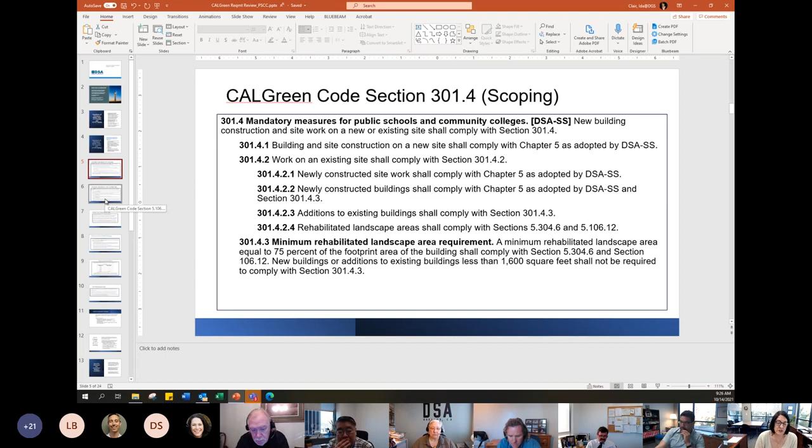Right now, these are not required for a lot of our existing facilities, except for rehabilitated areas for shade trees. But in the future, as we meet our energy efficiency and decarbonization goals, existing facilities may come into the fold. Our shade tree requirements, as an overview, are required in new surface parking areas, new and rehabilitated landscape areas, and new hardscape areas, covering about 20%. Obviously, if you have play fields marked for organized activity, we won't have you put a tree in the middle of a soccer field or basketball court, but near buildings, around the perimeter, there's really an opportunity to cool the site, and that's our goal.

So in our process, if it's not provided at intake, a note will get placed on the drawings indicating that we've seen that, based on your project, this is required and you've missed it. Again, it won't hold up project submission, but prior to back check, please provide this documentation so that we can close out the project.

Electric vehicle charging infrastructure is similar. Right now, infrastructure is only required for new parking areas or additions to parking areas, based on 10% of parking provided. When adding parking spaces, 10% of that total requires infrastructure, meaning raceway and panel capacity. It does not require wiring at this time, but facilitates installation of chargers in the future, either when required or when a school district chooses to install them. Just the infrastructure is required right now; the chargers are not required at this time.

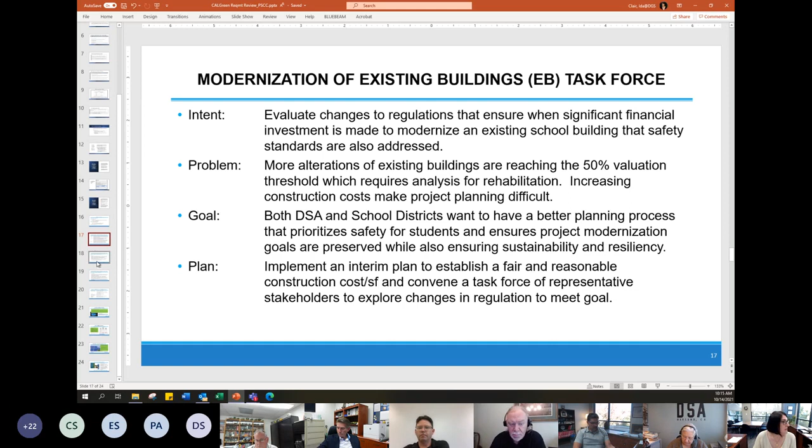So in discussing a little bit about our first plan, the interim plan, I'm going to offer Kurt an opportunity to discuss our process to hire a cost estimating consultant. And this will take us to whenever a regulation may come into effect. The earliest would be August of 2023.

Go ahead, Kurt. Sure, thank you, Ida. Good morning. I'm going to give them a little background because, as Paul Rooney said, we're always trying to help, and sometimes there's an unintended consequence.

And if you didn't know, this past June we reissued IR EB 4 for the rehabilitation required by costs. After that implementation, we heard from a lot of our stakeholders that there was an unintended consequence of that, and so we quickly rescinded it and reissued the previous IR, which stands right now.

And that takes us to where we're at today, trying to look at how we implement a new IR that is responsive to what is going on for the school districts and takes into consideration sufficient advance notice to implement the changes that are required, and the length of time for you to plan a modernization project without impacting your completion. That is our goal.

And so what we have done is put together requests for proposals from outside contractors who are specifically in the cost estimating business. As Ida said, we are not cost estimators.

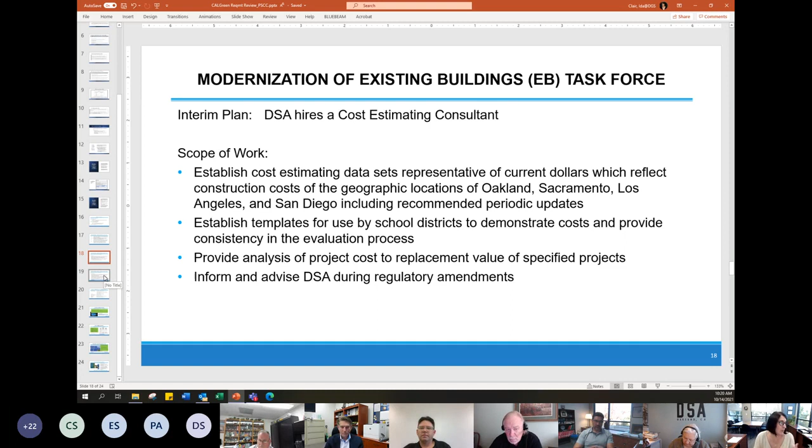We realize that we have consultants now to do our plan review work when we're busy. We're probably of the realization that maybe we need a cost estimating consultant for the ongoing work. Our goal here is to establish an interim cost, but maybe the regulation change will require us to still have that cost value updated periodically. So while we're saying this is an interim plan, it's interim till we figure out what the regulations require. But it may be that moving forward we do need to hire cost estimating to assist DSA. I'm going to present the task force component now, and then we can take questions on all of it so you can get the larger picture.

In the past, we've created task forces in the access team for access development rulemaking that have worked very well, and so we're using that model. What does a task force mean?

When we have a problem that we're presented with - I'll give you an example, electric vehicle charging station accessibility. Federal requirements don't have one. Access team was required to come up with accessibility requirements absent federal standards. So how do we do that? We need to inform ourselves of all the stakeholders and what's needed.

Essentially a task force is a representative group of stakeholders willing to work on a specific problem in detail. We come to the task force - it is selected by DSA from people who have indicated interest. In other words, we don't say, hey, will you join us. We say, are you interested in participating and doing the work? Because it will take work.

From who we garner interest, we will select representative people. Our goal is to have maybe a dozen people that are representative of who are affected by this change, very broad-based, and work with us on the problem.

So this is not necessarily an engagement like the PSCC where you are a conduit for reaching your larger audience. It really is that I have experience with this problem and I can provide a direct response as to your questions. DSA proposes questions to this group really on a fact-finding mission.

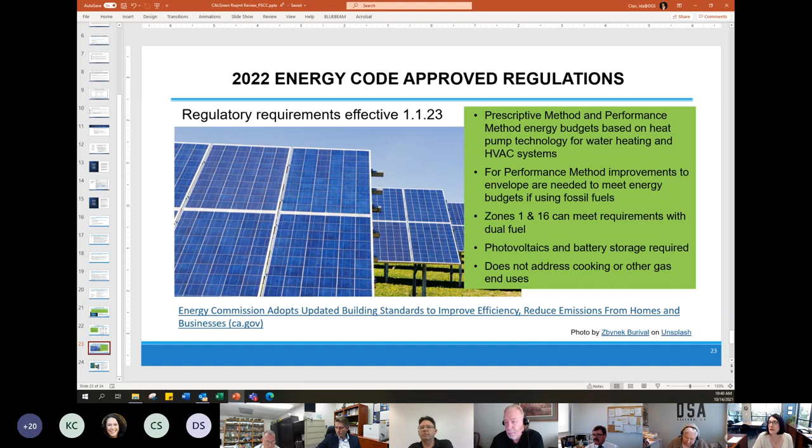I think it's important to understand that the carbon monoxide detection requirements are a model code requirement in the IBC and the IFC, which were adopted by the Office of the State Fire Marshal. So these regulations were not written by DSA or by the State Fire Marshal's Office. The amendments in Section 915 for carbon monoxide pertain to addressing certain statutory requirements, and that will be the italicized language you would see in 915. But again, that has to do with statutory requirements that the State Fire Marshal's Office has to include in this regulation when they adopted it.

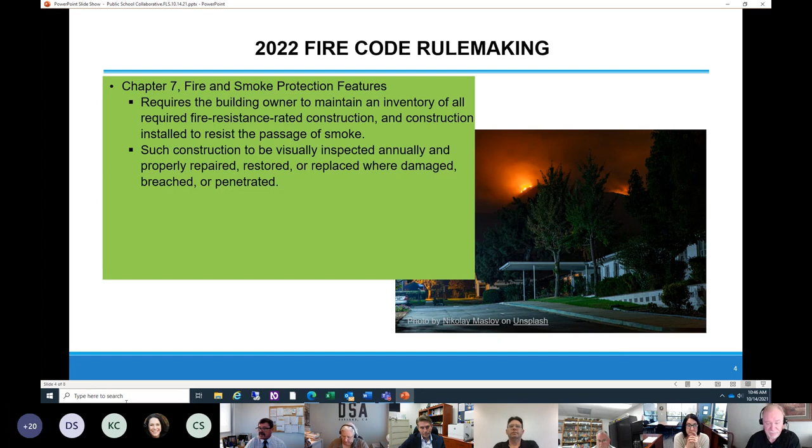Chapter 12 Energy Systems. This is something that is dear to the state's heart, again, in keeping with our net zero policy for schools. A lot of energy systems, battery storage, solar, photovoltaic, things of that nature going in on our campuses.

Some of the previous provisions in Chapter 12 of the Fire Code have been amended. There are requirements therein for emergency and standby power systems, plan information for construction projects, which is certainly going to affect the design community and submitting to DSA on plans for battery storage systems and energy storage systems on the campuses. These are certainly going to affect your photovoltaic battery storage or any other kind of emergency power storage system that is going to be constructed on the campus.

And of course, we're going to have commissioning and decommissioning, and operational and maintenance provisions included there in Chapter 12 of the Fire Code that, again, the facility staff are going to need to be aware of. So at the time of commissioning of DSA projects, you'll be able to get those records and maintain those records for further review or reference should the need arise.

Chapter 49 requirements for the wildland urban interface areas. Construction drawings that we're going to be in Chapter 7A of the Building Code. This is just to let you know that there are also requirements in Chapter 49 of the Fire Code. There's been some changes instituted, obviously in response to California's wildfires. Used to be fire season started in October and went a few months. Now it appears that fire season runs from January 1st to December 31st, and then we start all over again.

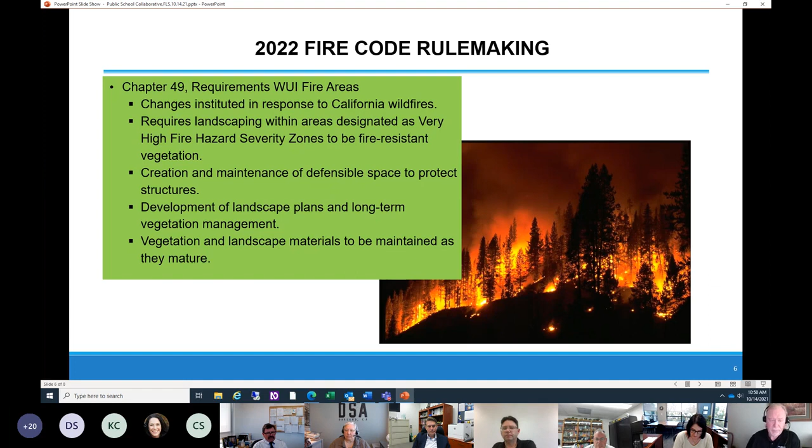Something new that is coming out in response to questions from a couple of landscape architects and some designers pertaining to fire department access and site water supply requirements. The FLS staff is creating a PowerPoint presentation to outline these requirements. Our goal is to ensure consistency and maintenance with the fire code provisions for emergency vehicle access and water supply.

When this is fully developed and ready for use by you all, you'll get an email message through our communication system that will let you know where to access this. The goal is to have this be available through our training area on the website in an on-demand format, so you can reference it at any time. It will be updated as codes update.

The goal here is to give some background into the whats, wherefores, and whys of the fire lanes and fire department water supply that is needed. This will be especially important for modernization and alteration projects and new construction on existing campuses where buildings may be sited such that they impact existing fire lanes, and now those fire lanes have to be modified or extended to the interior of a campus, which in itself can pose a problem. Real early on in the development design phase, we certainly want to address this type of an issue.

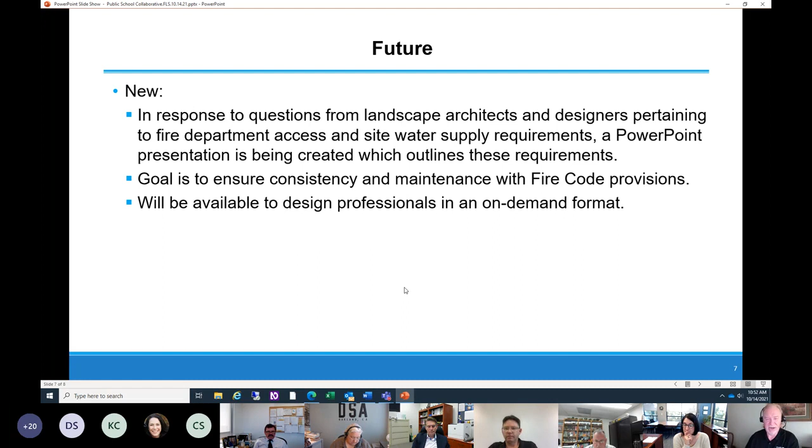I strongly encourage that you utilize the preliminary review appointment process at the regional offices to go over any such issues so you're aware of them ahead of time and they don't blindside you in the design end. And of course, subscribe to our listserv. We want you to get information and be informed about actions that are going on at DSA. Please make sure you have our current access and that you're getting everything you need. And that ends my portion, thank you very much.

Thanks, George. Do you want to take questions on that now at all, or? If there are questions, please. Anyone? Okay, Diane, thank you. Hearing none.

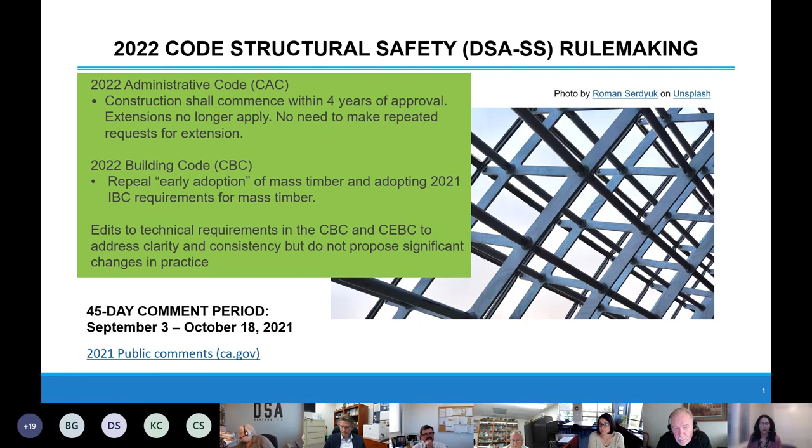As George mentioned for the fire, we're in the same boat for the structural safety package. We are still in our 45-day comment period. It ends on Monday. There's a link here. As mentioned earlier, you'll receive copies of this presentation, but you can go to BSC's website and see the full packages for all the agencies. There's also an electronic submittal for comments, but we're getting close to the end of the comment period.

There's language in the admin code that talks about a fee payment for landscape documentation. We're not currently doing that, so we're getting our regulations to catch up with that current practice.

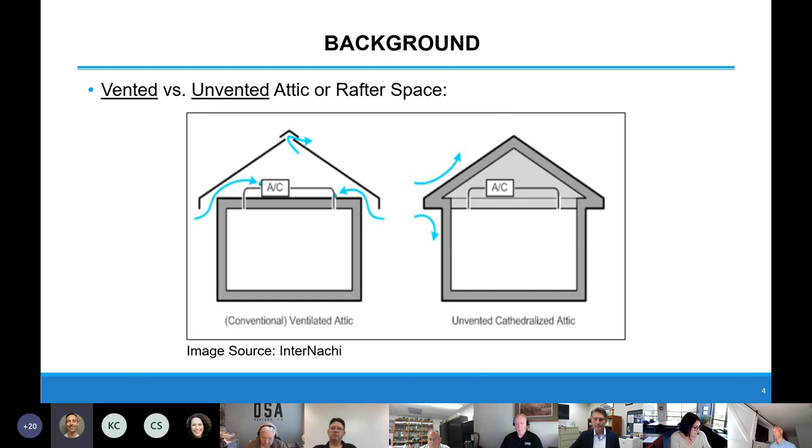Continuing background on enclosed attic spaces: traditionally, attics and rafter spaces have always required ventilation. It's relatively new that criteria were put into place allowing unvented assemblies. The concept was initially introduced in the 2016 California Energy Code, but wasn't made effective for DSA projects until new language was provided in the 2019 CBC, the current code. I've provided an excerpt from the 2016 CBC as well as the 2019 code.

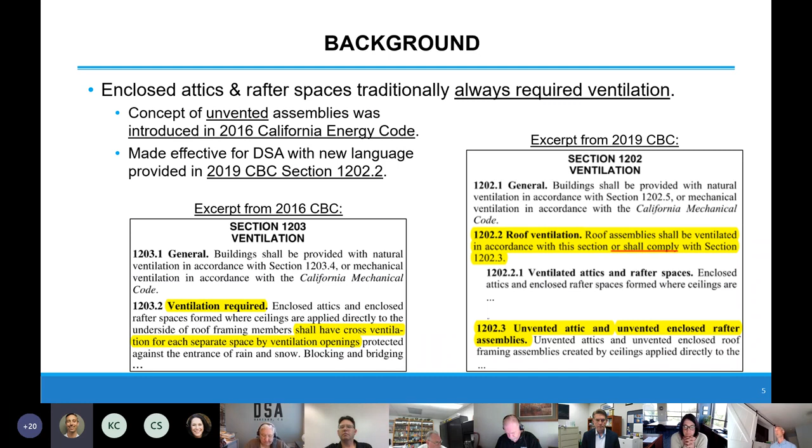On the lower left, you can see that ventilation was required: all projects with attic spaces shall have cross ventilation for each separate space by providing ventilation openings. In the 2019 CBC on the right, a new section 1202.2 was added stating that roof assemblies shall be ventilated in accordance with the prior section, or there's also an option to comply with section 1202.3, which lays out all the requirements for unvented attic and unvented enclosed rafter assemblies. That's just a quick background on when unvented was first allowed on DSA projects.

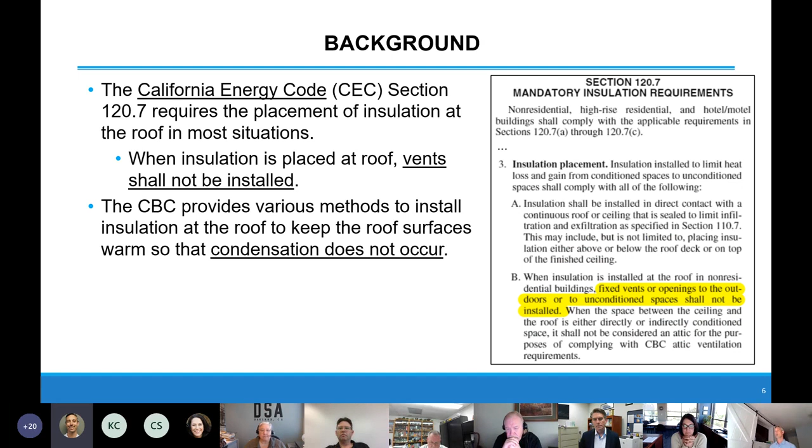California Energy Code also has requirements and provisions that come into play. I've provided an excerpt from section 120.7 on the right. They provide mandatory insulation requirements stating that when insulation is placed at the roof, vents are not allowed to be installed. That poses some problems that need to be worked out - we'll go into that, and we're trying to cover it in the IR as to what you would do when you're not allowed to install vents. The CBC does provide various methods to help with this, to prevent condensation from occurring and avoid material decay.

For the scope of the IR, it's primarily going to be covering two options for roof assembly types. You have the option of doing ventilated, covered in CBC 1202.2, which will address cross ventilation and opening requirements, as well as airspace requirements. We're also going to address fire life safety requirements, actually in chapter 7, but we'll get into that later. Then for unvented, that's going to be in CBC 1202.3, and we'll go over envelope requirements, vapor retarder requirements, airspace requirements, and finally insulation requirements.

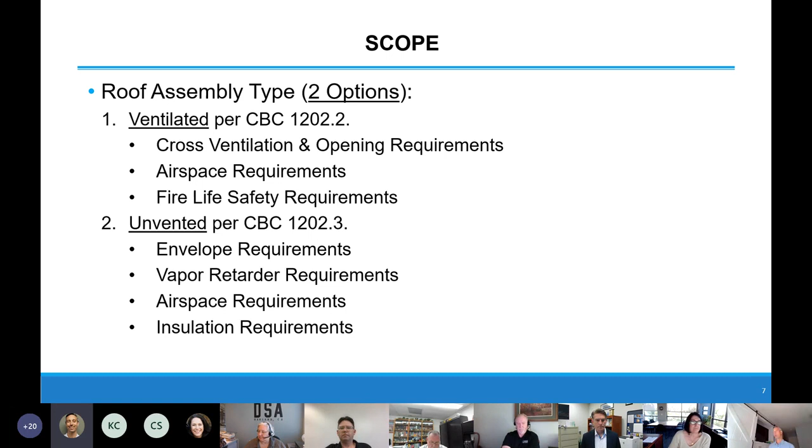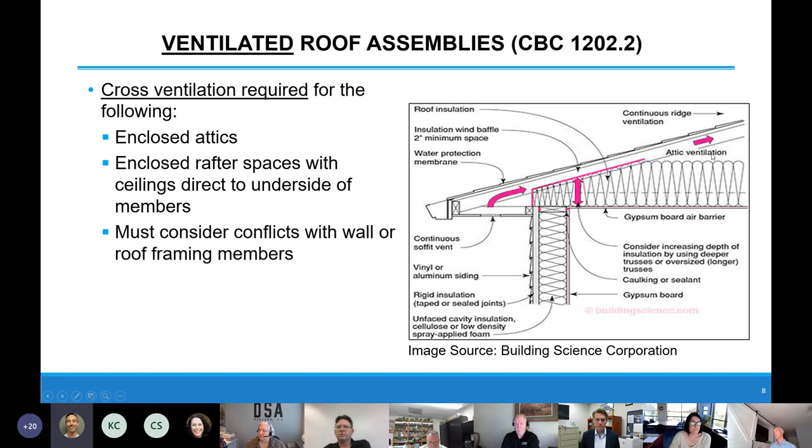A few things that need to be provided: you need a 1-inch minimum airspace between insulation and roof sheathing, and 1/150 net-free cross ventilation area. There are some exceptions that allow that net-free area to be reduced to 1/300 by providing a class 1 or 2 vapor retarder on the warm side of the ceiling. There are also venting area requirements that have to be between 40 and 50% of the area placed in the upper portion of the rafter space. Vent openings also need to be protected against the entrance of rain or snow.

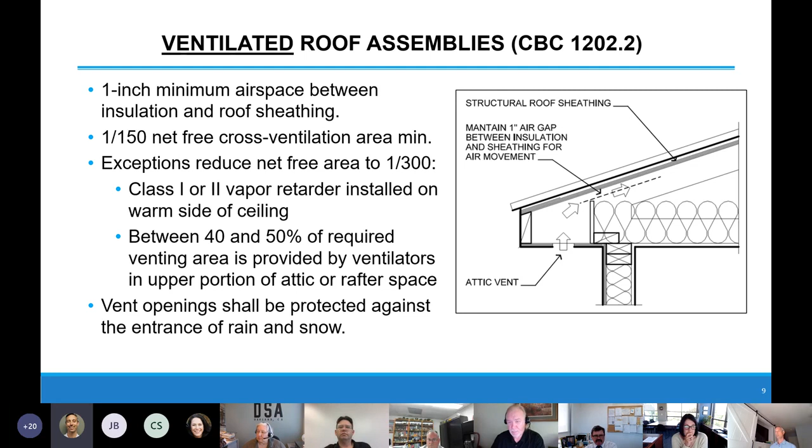As I mentioned before, some fire life safety requirements that we're going to be addressing in this IR: vent screens, when provided, for buildings located within fire hazard severity zones or wildland urban interface fire areas, need to meet the ember and flame intrusion requirements in CBC section 706A. Also, combustion air for fuel burning appliances needs to meet the requirements in the California Mechanical Code, Chapter 7. That also includes carbon monoxide detection, which is in CBC section 915.1.

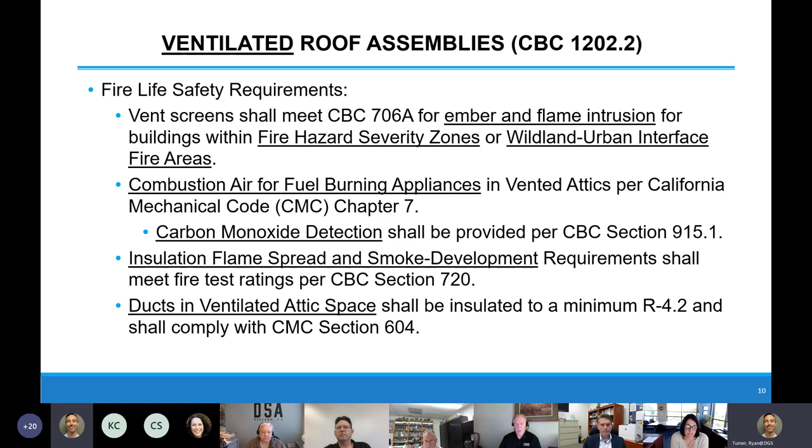Also, insulation, flame spread, and smoke development requirements are going to be addressed in the IR, and those will need to meet the fire test ratings per CBC section 720. Any duct in the ventilated attic space will need to be insulated to a minimum R value of 4.2 and shall comply with the California Mechanical Code section 604.

Okay, so now we'll jump into unvented roof assemblies.

So again, this is addressed in CBC section 1202.3. Any unvented attic and unvented enclosed rafter assembly is permitted, but there are 5 conditions that will have to be met. I'm going to go through these pretty quickly because we have a lot more on the agenda today. This is all clearly outlined in section 1202.3, but there are 5 conditions.

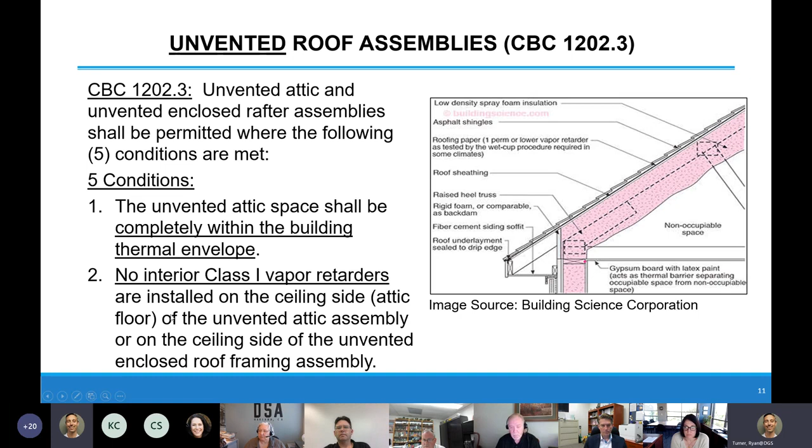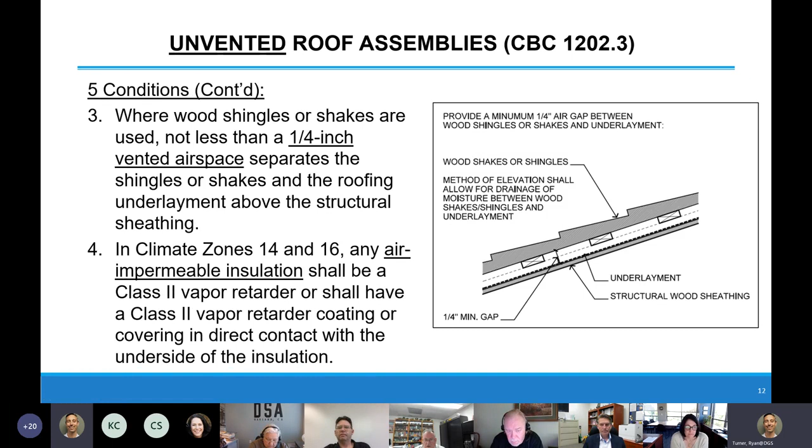The first one is it needs to be completely within the building thermal envelope. Item 2, no interior class 1 vapor retarders are allowed to be installed on the ceiling side. And if you have wood shingles on your roof, there needs to be at least a 1/4 inch vented airspace separating the shingles from the structural sheathing. And then for climate zones 14 and 16, if there's any air impermeable insulation, meaning the air can't flow through, it needs to have a class 2 vapor retarder coating or covering in direct contact with the insulation.

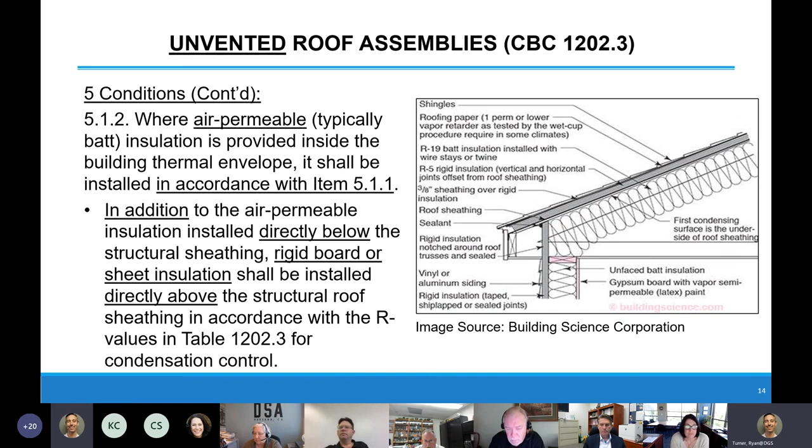And where you have air permeable insulation, this would typically be batt insulation inside the thermal envelope. It needs to comply with the same provisions in 5.1.1, but it also needs to have the insulation installed directly below the structural sheathing. A rigid board or sheet insulation shall also be installed directly above the structural roof sheathing.

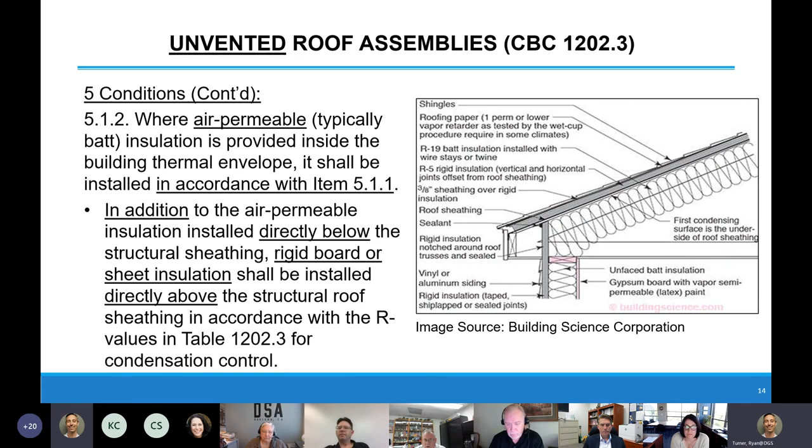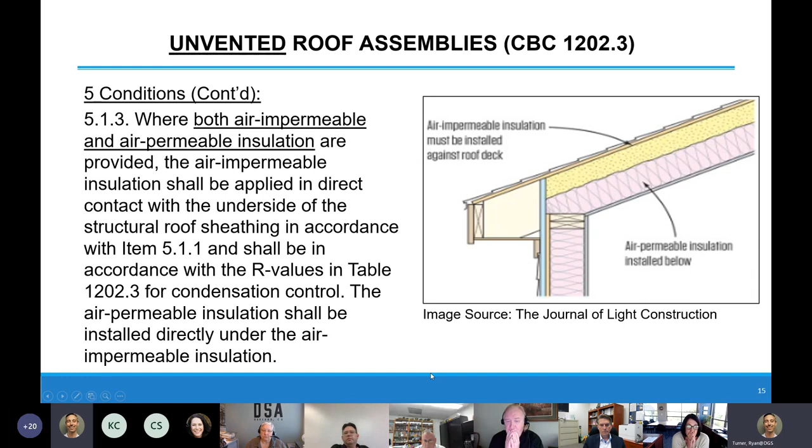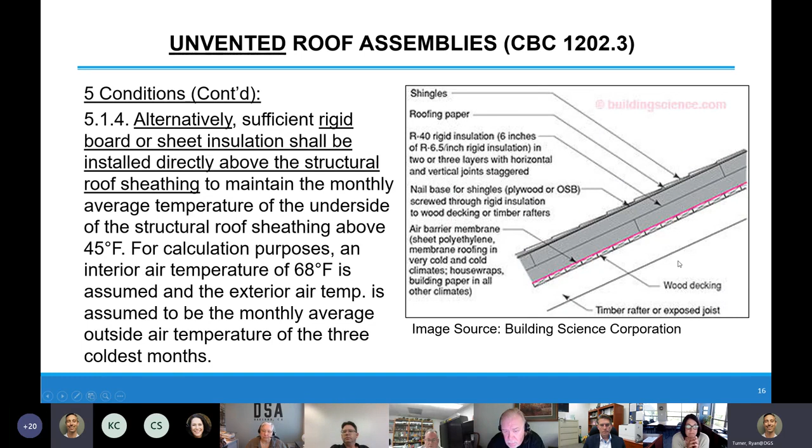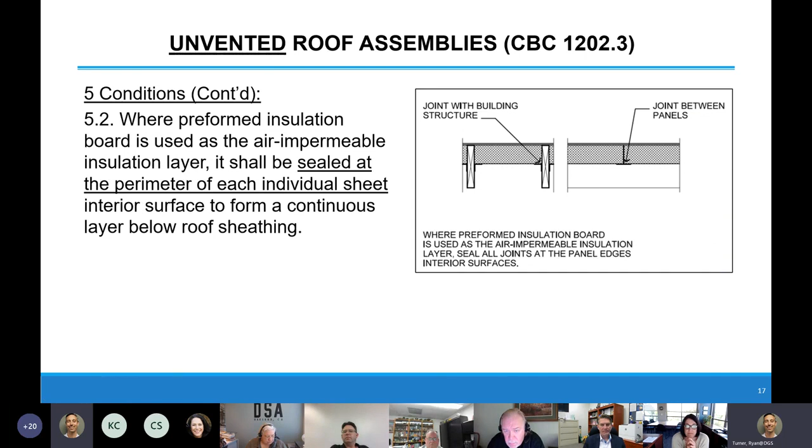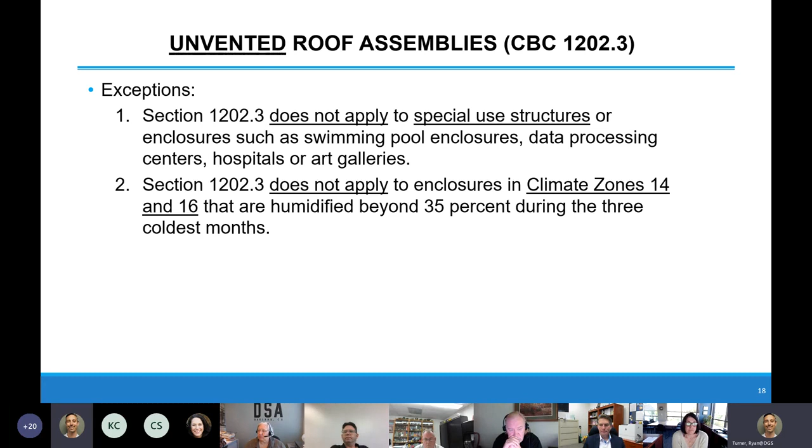And if you're using pre-formed insulation boards, it does need to be sealed at the perimeter of each individual sheet to form a continuous layer below the roof sheathing. There are some exceptions as to when Section 1202.3 can be used, so it does not apply to special use structures like swimming pool enclosures, data processing centers, hospitals, or art galleries. And also, if you have climate zone 14 and 16 that's humidified beyond 35% during the 3 coldest months, it cannot be used in those cases either.

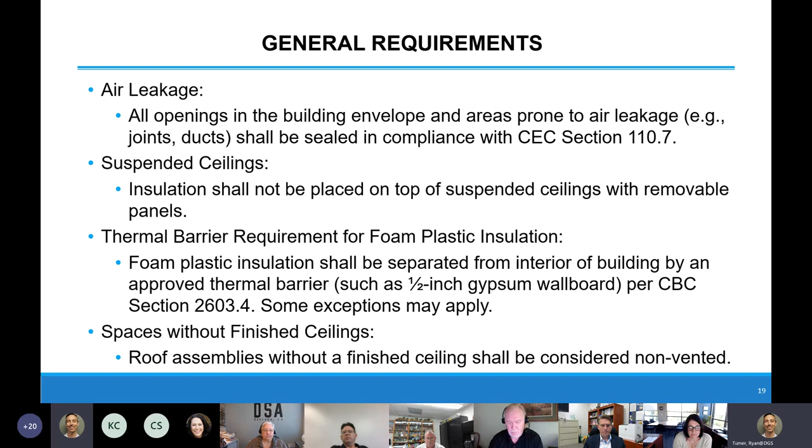The IR will also address some general requirements such as air leakage. It has to be sealed in compliance with Energy Code Section 110.7. For suspended ceilings, you're not allowed to place the insulation on top of the suspended ceilings with removable panels. And for thermal barrier requirements, the foam plastic insulation needs to be separated from the interior of the building by a thermal barrier per Section 2603.4. There are some exceptions that can be applied. And for spaces without finished ceilings, the roof assembly needs to be considered non-vented.

So with that, that concludes the overview. Again, this IR is still in progress, it's in draft form now. We're expecting after it goes through all of the vetting process and the formatting, we're planning to have it posted by the first quarter of 2022. Hopefully sooner, but I just wanted to provide a rough idea of when to expect that. So with that, I'll open it up to any questions or comments.

This is Crystal, I have a question. So these roofs are for residential and commercial, is that correct? I believe it's just non-residential for some of the requirements. Perhaps George or Ida, you might be able to answer that better.

I'm trying to remember from that chapter 12, it is in the building code. I would say for multifamily, it probably applies just because the residential code applies for single family and smaller projects, and I haven't checked that. It is a requirement for non-residential, and we receive a lot of questions with the addition of the batt insulation, but also requiring the rigid on top, depending on the climate zone, and a lot of this is to protect the sheathing from mold and moisture requirements. But that's a good question. I would say from memory where it is in the code, I don't believe it's expressed specifically for non-residential, but I mean yes, explicitly for non-residential, I would believe that it might apply. Sorry, don't have a definitive answer for you on that.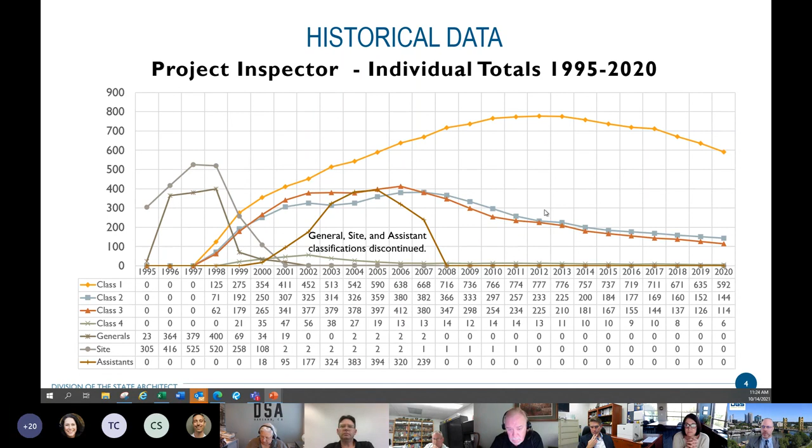So now let's talk about some USA retirement trends. Based upon a 2014 Gallup study, it turns out that the actual retirement age has increased over time. Back in 2002, most people actually did retire at around age 59, that was the average. Then in 2014, it went up a little bit to about 62, so we're seeing a bit of an increase there.